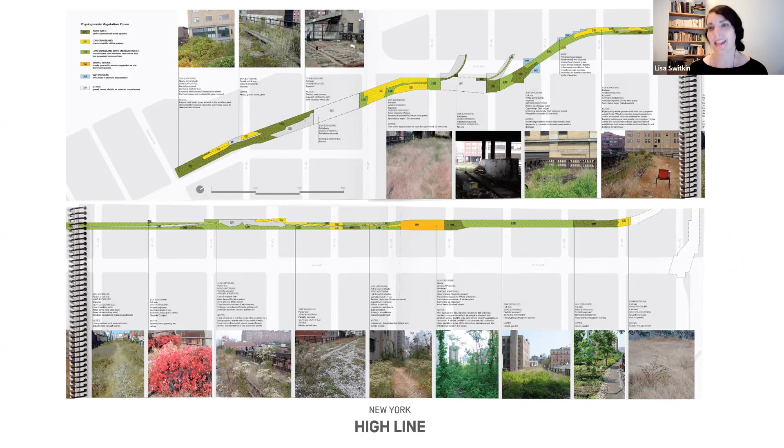Obviously we wanted to build on the native plant communities that were there. But it's not so different than the cadence of the High Line today, even though that integrates people as a different layer onto this drawing. But now you are in the designed format.

This was one of the areas where trees were growing up to catch the light, and we were able to create a renewed thicket with a much more diverse plant palette. Now you can have birch grove to the grasslands, which were based on dry gravel prairie species, working closely with Piet Oudolf, which also has a seasonality and a texture. So throughout the year you get this really different experience and range, and it's not even seasons, it's almost daily — a different type of experience based on the plants, etc.

Looking at areas and their relationship, this was one of the only spaces that was open to the river, so there was a lot of sunlight. The design here was very much about opening up to the river and creating moments for sunbathing at the sun deck, where we knew there wouldn't be future buildings overhanging — moments where preservation and innovation come together, creating a new experience.

And where the High Line — this was one of the old billboards — was really meant to now be a window to the city. So by evoking the language of the billboard, but creating a new relationship and dialogue to the city itself. In addition, the types of furnishing, the constrained space — only 30 to 50 feet wide — allowed people to have a really unique dialogue and experience with each other.

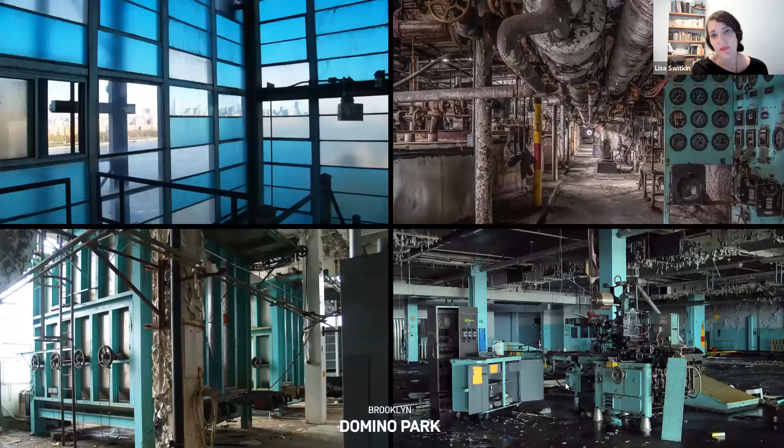So one of the things we did was develop the artifact walk, which includes over 30 large-scale salvaged artifacts, components of the inner workings of the sugar refining process.

These are just some images. People always ask me about the blue - this was actually the domino blue that was found inside the factory, and those were reinterpreted on site. The columns are the existing in situ columns from the raw sugar warehouse, and those were the original gantry cranes, et cetera. This became a sort of backbone of the park, meant to give a different experience and also inspire people to be curious about the history of the place.

Since the opening, the park has really become an important anchor for the neighborhood. It's a place where the community comes together for both recreational and cultural purposes. It's been recognized as one of the most diverse parks in Brooklyn, and it's had over 3 million visitors.

Those artifacts you can see - these were the old syrup tanks next to a volleyball court, which was actually something the Latino community was really excited about having here on the waterfront.

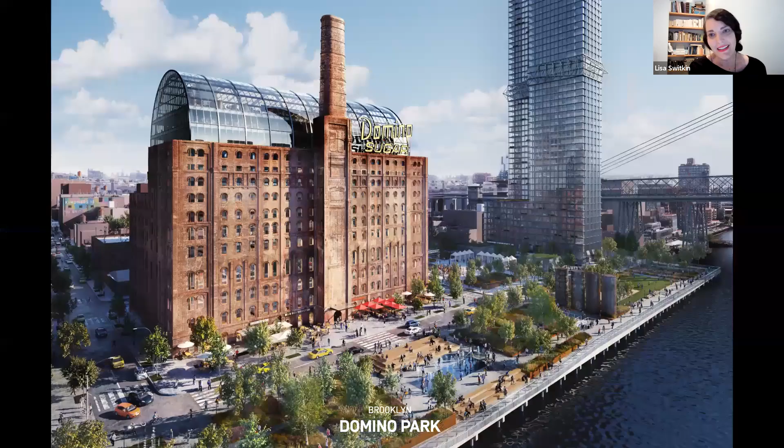The refinery itself is really the heart - this is an adaptive reuse, it will be office space, and it's really the heart of the site. This was a moment where we also wanted to have an expression of water, because in this case it was a platform and we elevated it. I'll show you a different example where we looked at another way to connect to the water just further north of here. But this was another chance to experience the water and have a connection to it with this elevated platform, built to be above the new FEMA elevations.

And that other expression, this is a pier reveal where you can look down into the pile structure and hear the river, the power of the river, sort of the tidal river. It's really an estuary going back and forth right next to the syrup tanks.

Engaging with the local Brooklyn artist, Mark Reigelman, to do another interpretation, he built this incredible playground here. And then through a partnership with the St. Nick's Alliance and the Green Workforce Development Program, the park also hires locally and does all of these other things

to really build on this relationship with this particular community. It's also been a real resource, like all of our parks during the pandemic, as well as a place where people came together for protest and to express themselves.

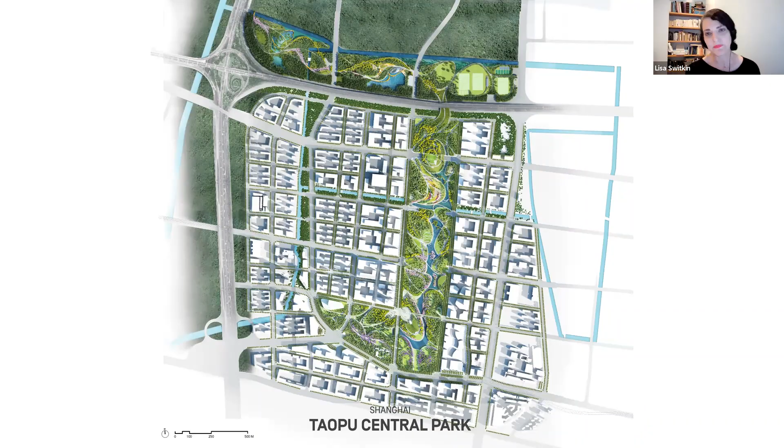So this was the initial plan for that central park, and you can see all of the development around it. It's 247 acres. So again, it's kind of like a central park model, but it's actually also working to prioritize pedestrians. It's a large contiguous park. All of the roadways are actually sunken. You can see the image here where you can see that sunken roadway and the landform above it.

And then all of the waterways are really meant to be a kind of new ecological park. So they're improving the water quality, managing the stormwater, etcetera. This is a city that experiences frequent rain with a really high water table, so it's less than 2 meters below the surface. Shanghai generally is in need of a lot of flood control.

In response, the project's water system actually connects to the existing canals. There's this central valley, and this channels and guides the water through a series of aeration features and cleansing wetlands to filter and improve the water quality, while also collecting the water for reuse on site. At the same time, it creates this really incredible kind of otherworldly experience.

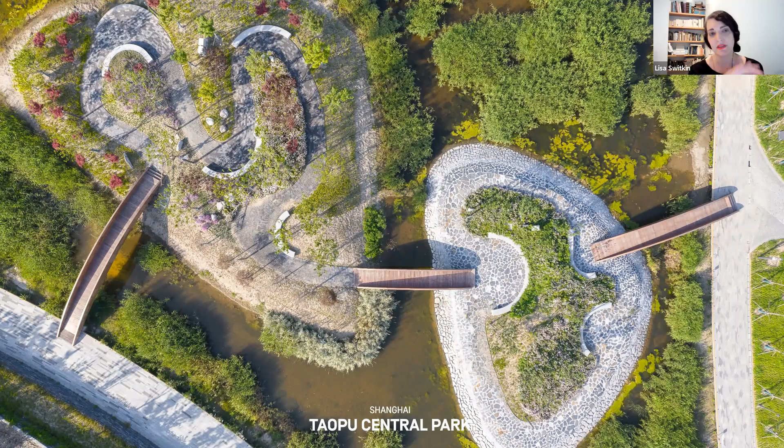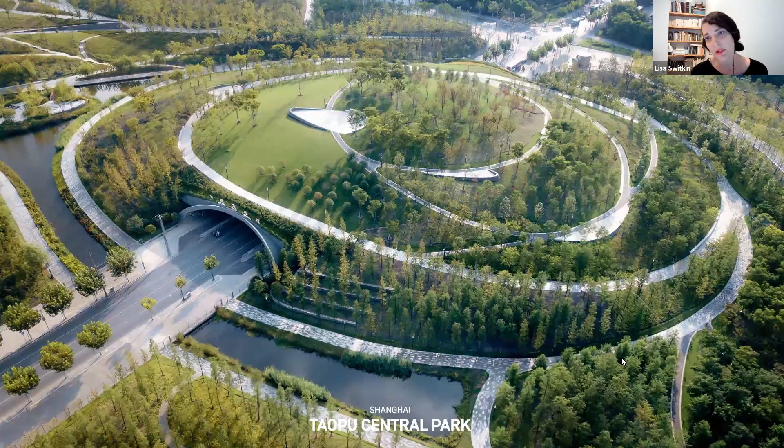These are then a series of different islands in many ways that are connected by a series of bridges over that waterway and those functioning storm waters. This is again an image of the land bridge over the existing road.

You have moments like this where there's a bird tower in the middle of a very, very dense area where you sort of feel both a part of, but also apart from, the city around you.

And when you're down on the ground, there's this really immersive experience, being within these incredibly rich and functional ecosystems. It's part of a larger sponge city initiative that's happening all over China. Again, with the topography and the waterways, you really have this incredibly immersive experience on the ground as well.

This is actually a shot from one of the nature play areas, and these were incredible tunnels that were weaved with local craftspeople in China. Really incredible work.

There's a tunnel that has now been done. The Alaskan Way Viaduct had to be taken down due to structural issues. A new seawall had to be built. And so these large scale infrastructural projects actually tied to a new public realm and rethinking this for the waterfront.

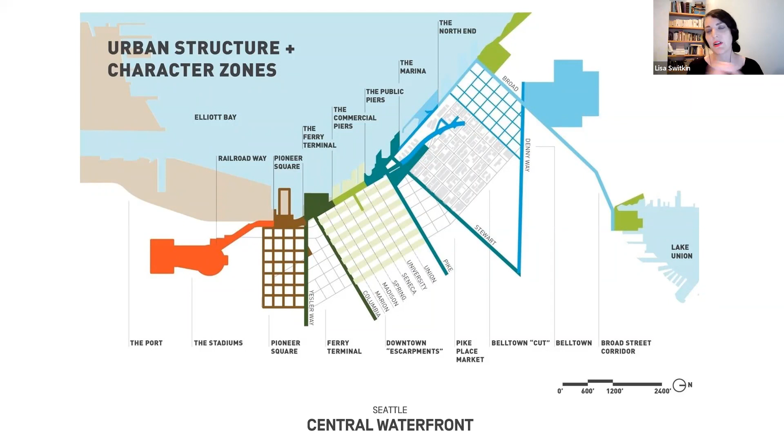Looking at the full 1.5 miles, I began thinking about how these really connected back into the different areas and neighborhoods, from the port to the stadiums to Pioneer Square, which is a historic neighborhood, to downtown, and then Belltown. So all of these really different places, and a very large bluff with topographical differentiation and elevation. The project sought to not only tie along the 1.5 miles, but also back into the city. This was not easy.

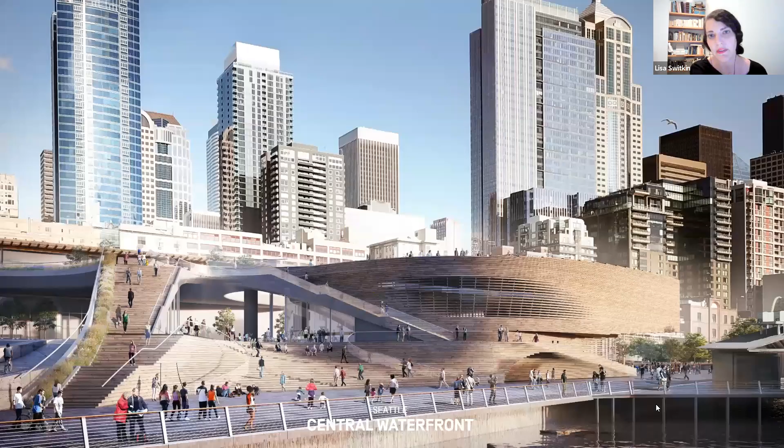This was a new seawall, done to meet new seismic standards and to protect critical infrastructure. But one of the things that was really important to the city, and to us, was that it also enhanced the habitat. It creates a light-penetrating surface which allows the salmon—anyone who knows Seattle knows that's a very sacred animal there—to make their run. They used to actually get caught in this area because it was so dark, so the light surface allows the salmon to continue their run.

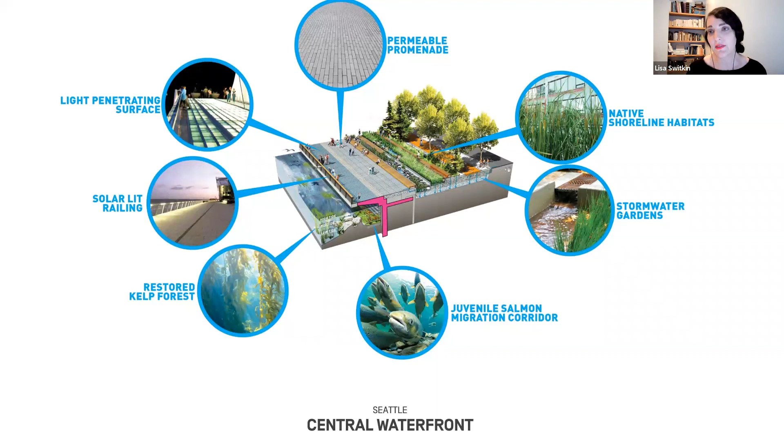Freshkills is probably one of the more foundational and very dear projects to me personally. It was one of the first competitions I worked on, back in 2001. It was about designing landscapes of time and regeneration and process, where the staging and the process of making and remaking and reclaiming was really part of the design. It was meant to foster and nurture a stewardship of the land over time.

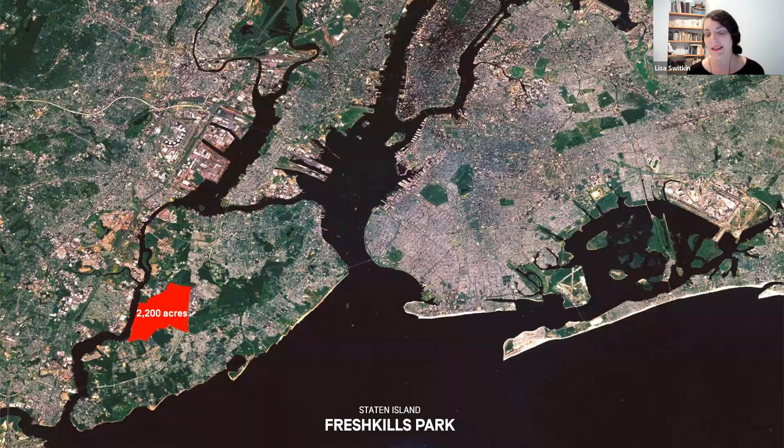The project transforms 2,200 acres, one of the world's largest sanitary landfills, into a new type of public park. We imagined it as a place with seed farms and composting fields and tree farms alongside large-scale wilderness programs such as camping, mountain biking, or boating. Of course, this is a landfill site, so it's ecological in the sense that it's a huge environmental reclamation project and renewal on a vast scale.

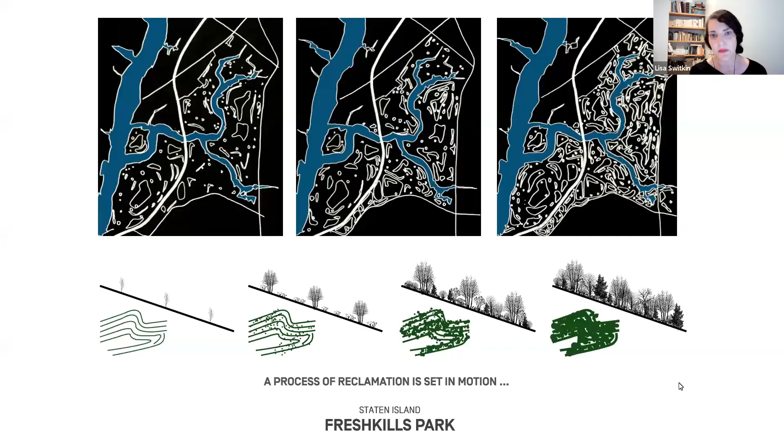But it also has a lot of different layers and constraints. It's a kind of world of contrast because you have this highly engineered space, and I'll show you some images where it's naturalized over time, working with the sanitation department to establish new cover crops, etc., that would promote more biodiversity. You have these almost incredibly unusual naturalized conditions in a highly engineered substrate. But it was all part of the notion of the master plan.

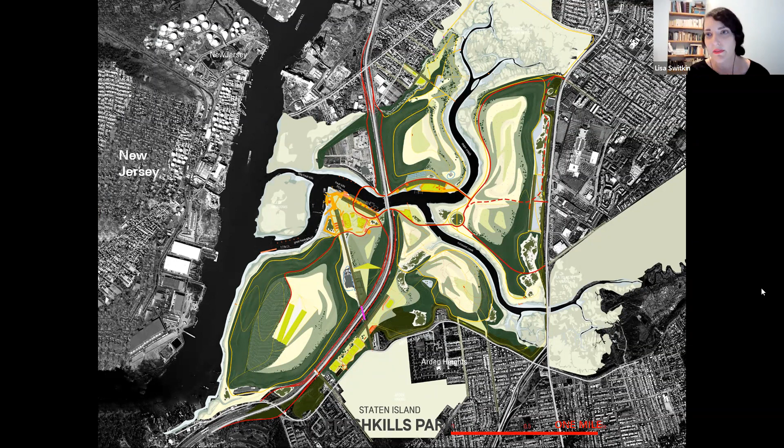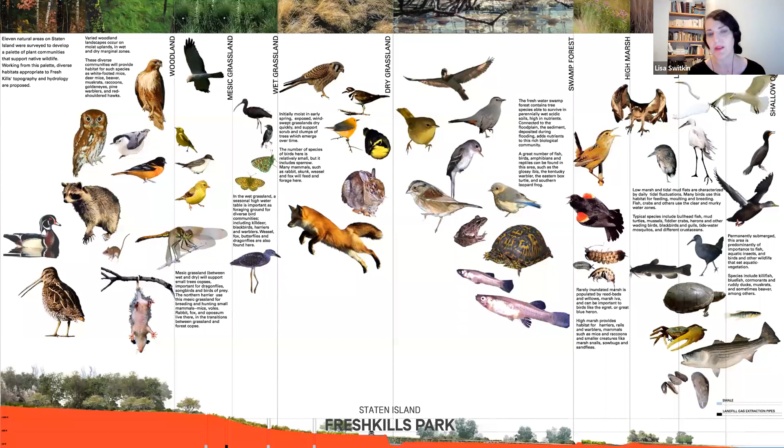These were the original landfills. There's actually an incredible creek that runs into a natural preserve here, but then there were the series of different landfills on top. The master plan sought to create this inner loop as well as connect all of these territories and build off of the existing wetlands as well as the mounds themselves. These were some of the original drawings from the master plan, including thinking about ways that the transit could actually reinforce and promote wildlife.

There was also a whole piece of this that had to do with changing the mindset of a place that was really about trash and garbage and smell into something about renewal. Even the name Freshkills was quite unfortunate, and we had to do a campaign explaining that 'kill' is actually the Dutch word for stream. So it was all of these different things that were creating this new way to think about the place.

We helped develop these native meadow mixes with the sanitation department, the parks department, and the Freshkills Alliance—also even having goats to help with some of the Phragmites control.

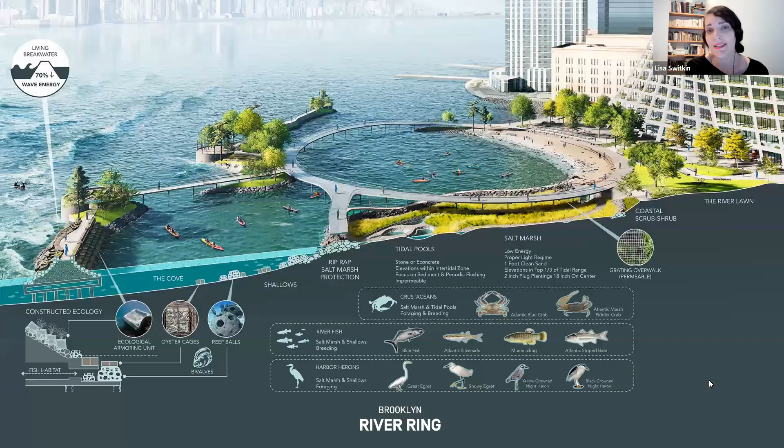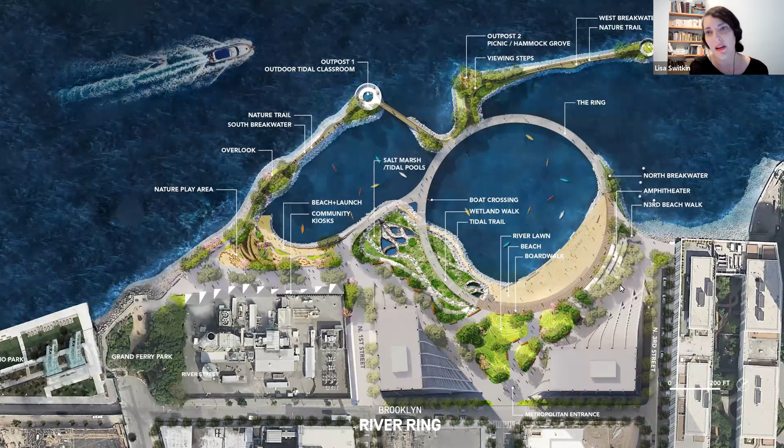There's a functional wetland with a tidal trail, there's a new beach, and then there's also some more standard park amenities such as a nature play area, lawns, amphitheaters, etc. But the idea is that you can actually go out into the water.

These were some of the initial wave agitation maps. On the left you see the waves, and then with the breakwaters, what you're seeing in blue is the calmer waters, allowing the space to function both for habitat and for water access.

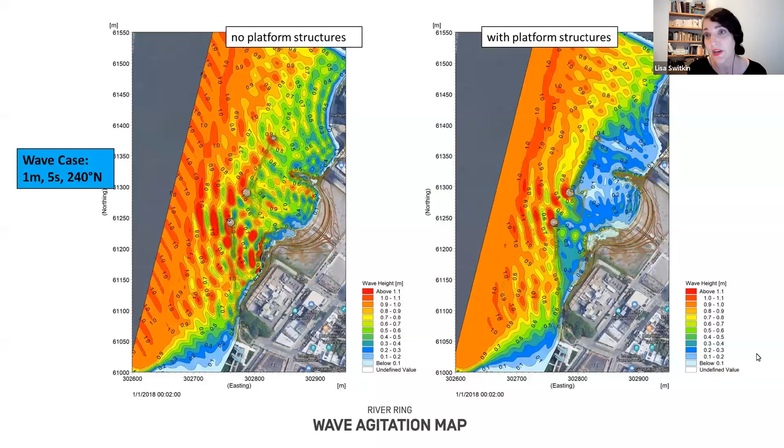Our ecologist was looking for different precedents, and Jamaica Bay was the preeminent wetlands and shallows complex. So while at a much smaller scale—at the scale of the tiny little red mark here—it was really modeled off of that, so you don't have stagnant waters. The water is allowed to come in and move around, and at the same time you get protection from the wave breaks. When you looked at the bathymetry, velocity, salinity, and all of those things, they actually echoed each other, with certain things even being a little bit better, such as higher velocity for flushing.

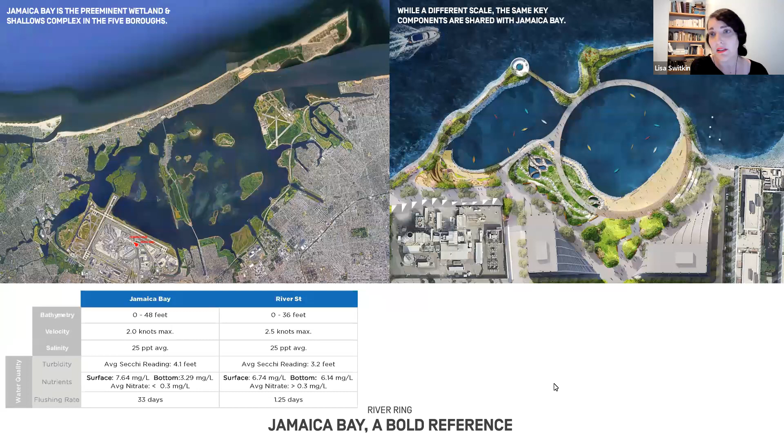This drawing is more technical, but it's one of my favorites because it shows all of the different intertidal habitats happening under the water—things you won't always see at the surface. But the idea is that with the tidal landscape here, you start to really begin to experience those at different times of the day.

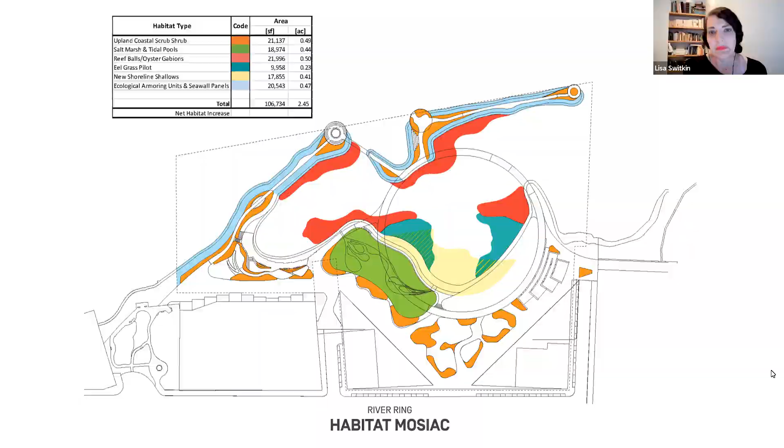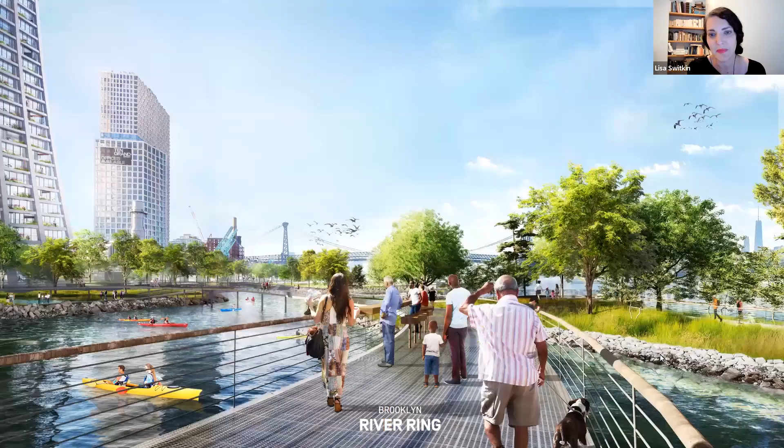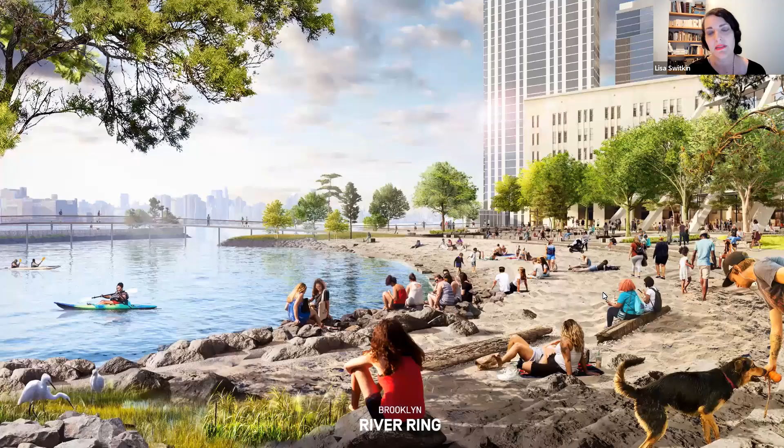And then, of course, some of the renderings show how the buildings are designed to open up and allow a really inviting, welcoming entry into the park itself, being on the river ring, and that really different experience of being out in the water instead of the more standard bulkhead experience. You could actually see the breakwaters beyond.

The beach, which is protected here by the breakwaters so that the sand doesn't actually go away, also allows for calmer waters inside so that people can boat, etc. And the functional wetland with the tidal trail.

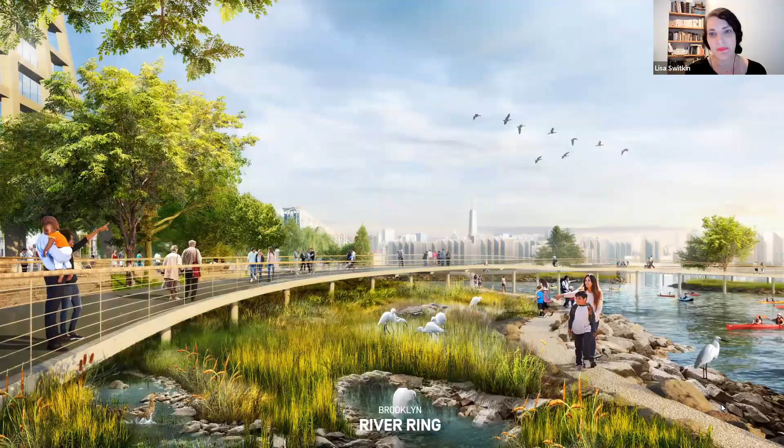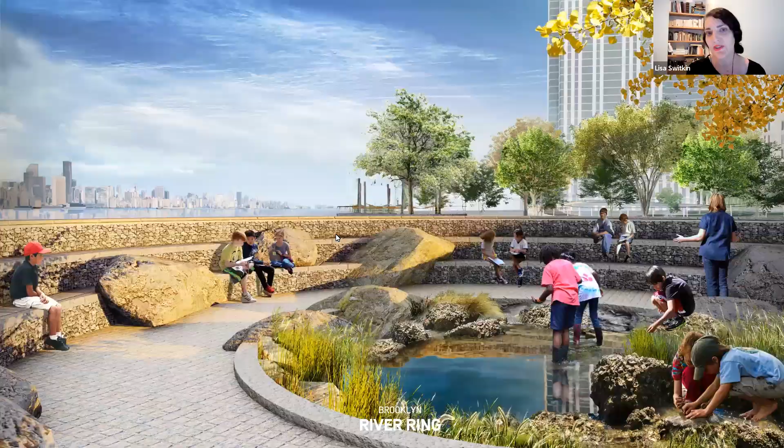This is one of the images of being on the living breakwater. So many breakwaters - this isn't a new thing, but many of them are actually inaccessible, being used throughout the city. This actually converts them to a nature trail where you can get to some of the old retrofitted caissons, showing an outdoor tidal classroom working with the Billion Oyster Project, etc.

So two more, just to continue to hopefully provoke your minds and thoughts. I wanted to talk a little bit about the Qianhai Water City, because this is a project that has also been in our office for quite a long time. It was a proposal for a sustainable new city for 4 million people in Shenzhen, China.

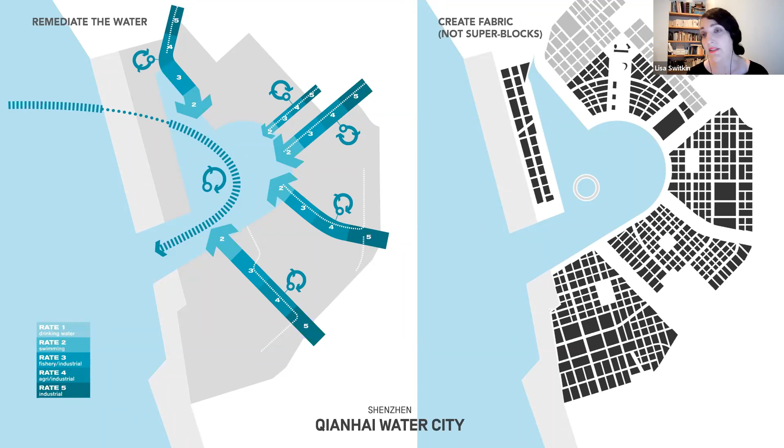We proposed to organize the development and infrastructure through a series of what we called water fingers, meant to remediate the water. It's in the Pearl River Delta, which is mostly reclaimed land and notorious for exceptionally poor water quality. The idea was that this would not only structure the city and become the public open space, but would filter the water, turning what was seen as a liability into a new asset and resource for the area.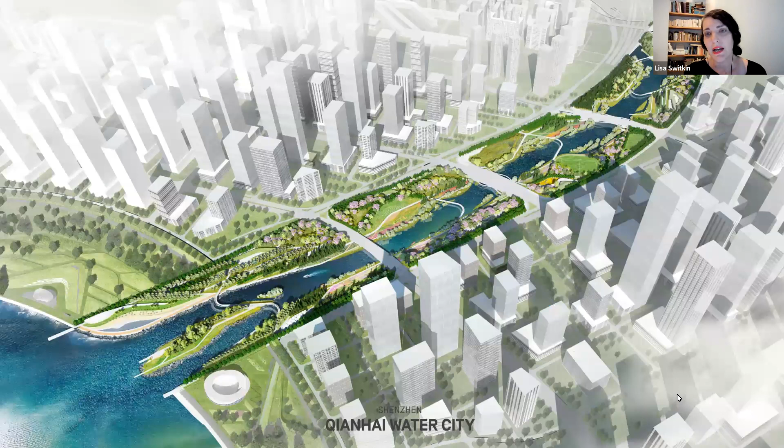We then looked at the first water finger and started to study that, called Guiwan, in the context of the city. These images we just got a few days ago, which is kind of amazing to me - this is being built. This is the first of the water fingers, beginning to filter and clean the Pearl River Delta, and also becoming this incredible public park system.

And finally, I wanted to end on Shelby Farms Park. It's one of the projects that perhaps isn't as well publicized, but it's really an incredible project and one that's very dear to me, that I worked on back in 2007. It's 4,500 acres, so that's nearly 5 times the size of Central Park, and it's about 12 miles east of Memphis.

This drawing shows its potential in the city to be really linked, but it was quite isolated, and many people didn't even really know about it in many ways. This diagram shows how to link it both back to the Mississippi River as well as down to downtown Memphis, and across - there are lots of different isolated communities to the north, south, east, and west.

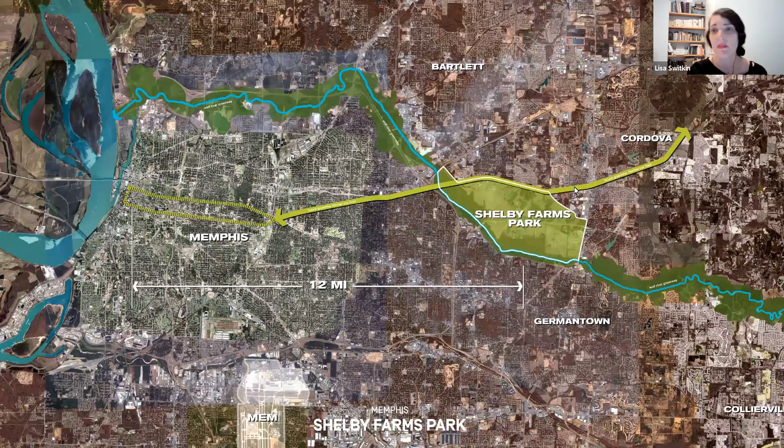We had a competition, which we won in 2007, where we looked at this notion of 1 park, 1 million trees, and 12 landscapes. It was taking all of the different landscapes that were there - there's an agri center, a landfill, parkland - and tying them all together.

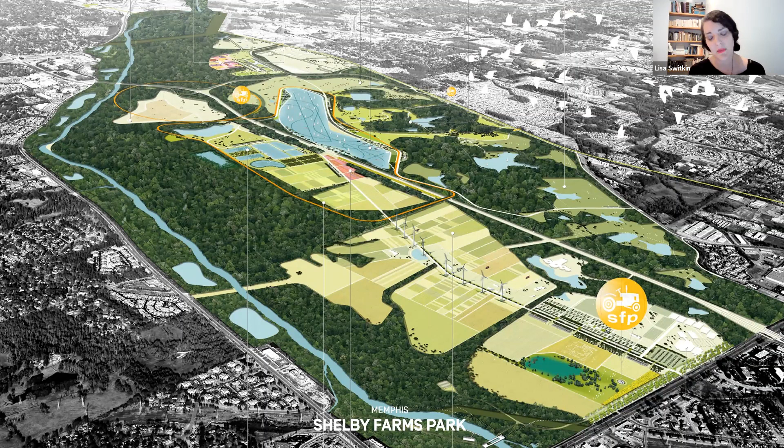The 1 million trees was beginning to establish a new canopy coverage along the whole thing, which was also to unify the park as well as create these ecological corridors and connectivity. An expanded lake in the middle to deal with some pretty significant hydrological issues, but also to create a centerpiece, and a number of other interventions.

And the first phase, which is 195 acres, called the Heart of the Park, really plays a major role in anchoring it. It was opened a few years ago. This is the expanded lake in the center, and you can begin to see some of the new meadows and managed forest, etc.

You create these moments with restored shorelines, also moments to get out into the water and experience it in a really exciting new way. It includes hundreds of native trees and dozens of acres of wetlands, meadows, and lawns, and many of the plantings were actually developed to attract birds, butterflies, and wildlife.

The park also connected additional trails, so now there's more than 40 miles of trails, and it allows people to travel by foot, by bike, by horse, by shuttle, by boat. It's incredible, all the modes of transportation that are here in Shelby Farms Park.